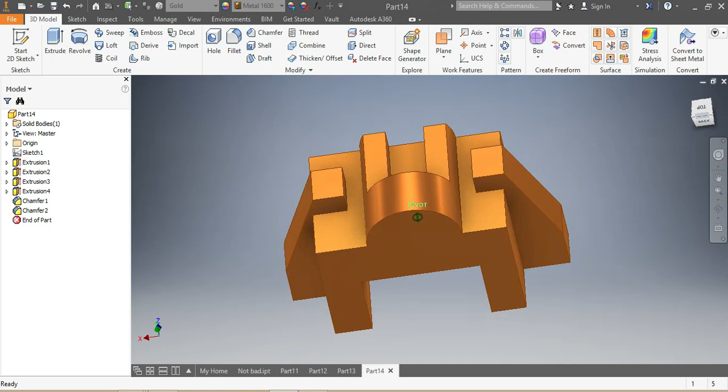How about we draw this mechanical part that we see in front of us? It looks a little bit complicated, but we're gonna go through this. So first we go on new, knowing that the dimensions are in millimeters, go standard metric, millimeter, then go create.

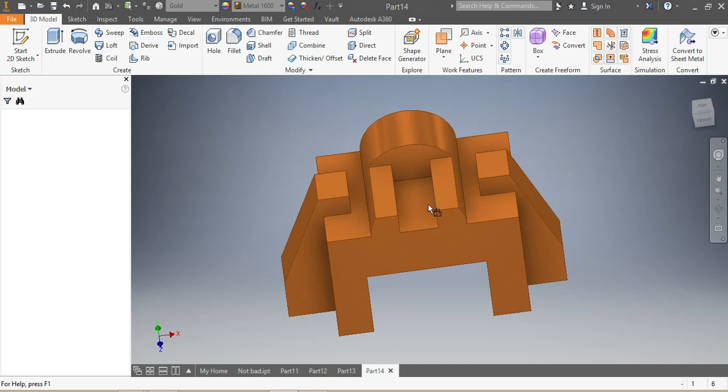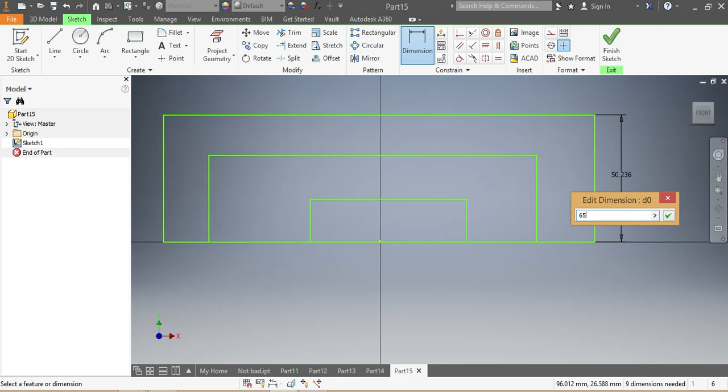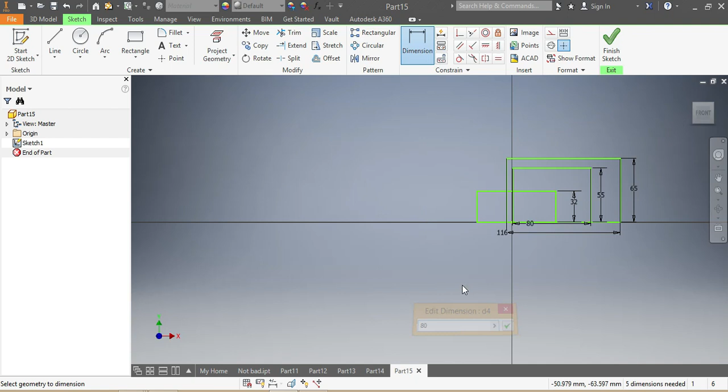In here we're gonna start with rectangles. I'll start with the first one, the second one, and the third one. This is gonna be faster and easier for us. So that's one, they need to be 65 millimeters, the second one needs to be 55 millimeters, the third one needs to be 32 millimeters, and that one needs to be 116.

This one here needs to be 80, and the last one now needs to be 50. So we need to make sure that these lines here correspond with that point that we see here, as our center. So that one's gonna be 25.

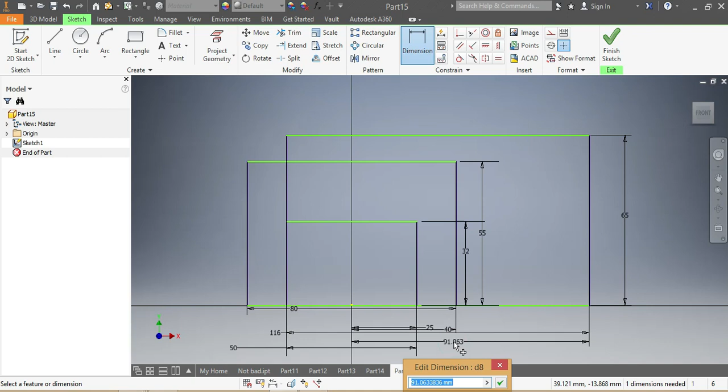Don't worry about that, everything's gonna be in order. So this one here gonna be 40, and the last one from the top to that one will be 58, as half of 116.

So now once I have this placed, I'm gonna go for this part here. For that part, I'm gonna draw a circle. There is my circle, and I need to make sure that this one here is 40 millimeters, almost 40. So for now, I just need to make sure about that. This one needs to be in line with that one. It's in line.

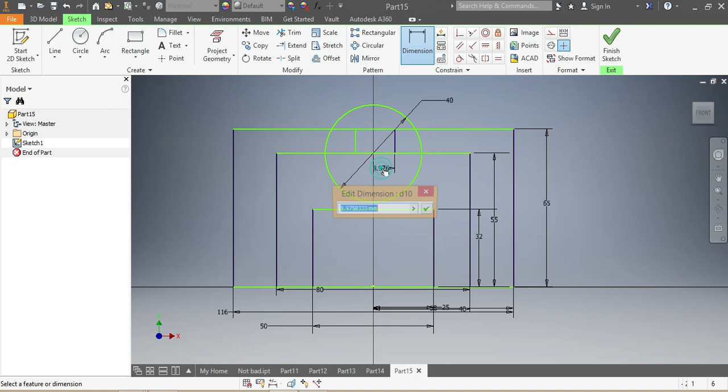And then I'm gonna go for a rectangle. I need to have a rectangle here. There is my rectangle, and this one here from the top needs to be 8 millimeters, and from there it needs to be 16.

Once I have those in place, I'm gonna go for another rectangle. This rectangle here, that side needs to be 54, and this other side here, it's fine, we know what it is, it's 10, so we don't need to worry about that side. And from the top it needs to be half of 54, which is 27. Have that one in place.

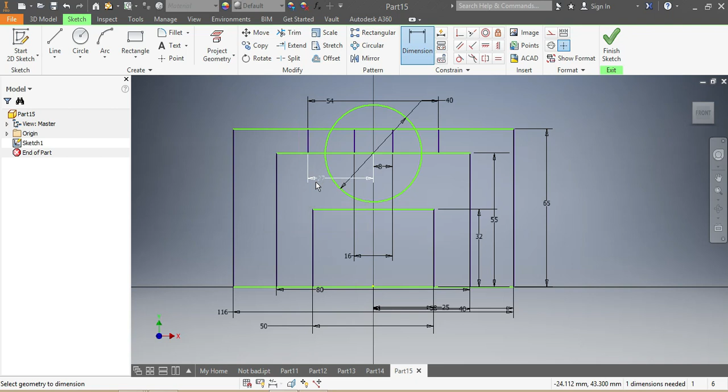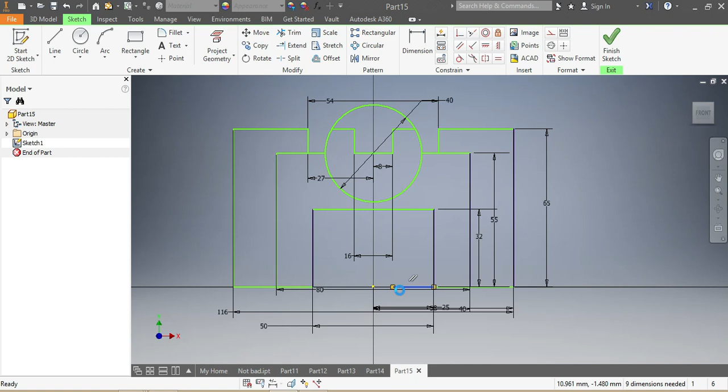Now I'm gonna go to trim. I need to trim this part here as many times as I can. Then I need to trim that one as well, and here, this one too. Oh, I forgot, I need to trim this one as well. I need to trim here, and there again, and I need to trim this here. I had 4 rectangles, so I need to make sure I trim them all.

So now you have the frame, you have to remember to remove this one. Now you have your frame, the frame of your drawing. Now you can go into 3D model.

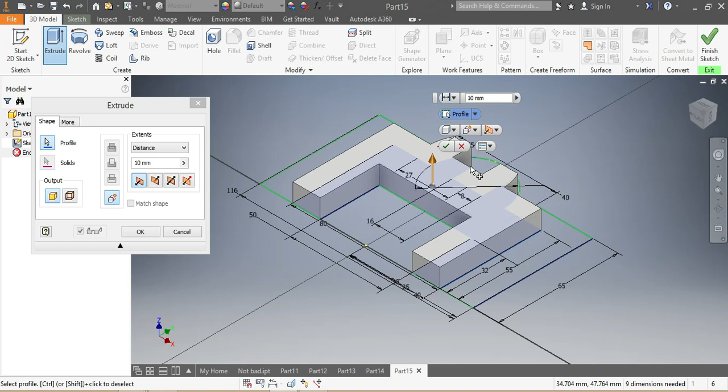So now you go to 3D model, and you click on extrude. You need to extrude this front part here by 30 millimeters. Then once you have it that way, you right click and select visibility. Once the visibility is on, you can see what I'm seeing now.

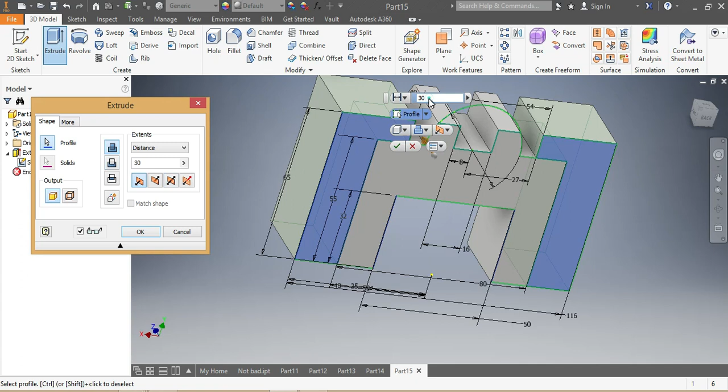So you come again, you click on extrude. You need to extrude this part here, this one and that one, by 15 millimeters, not 30, by 15 millimeters, as it is here.

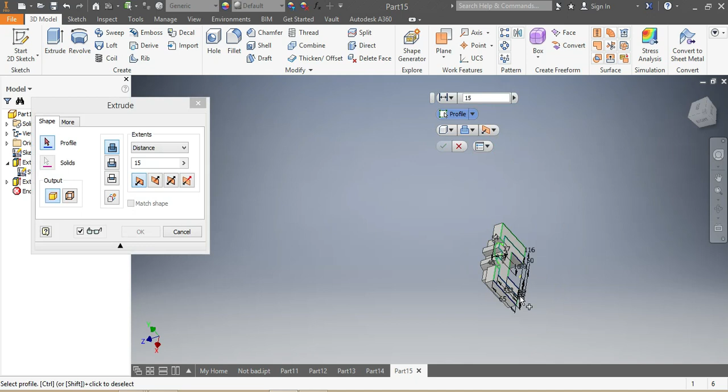Then you come back again, you click on extrude again. You come here, and you need to extrude this part here.

Now, which part did I say? Oh, that was the right part. So you need to extrude this part here.

Okay, so now the other way around, sorry. And now by 20 millimeters. So 20 millimeters - don't forget the half circle there. That part as well needs to be extruded by 20 millimeters.

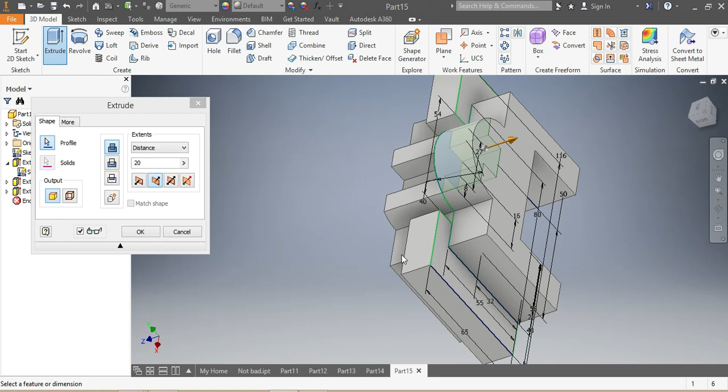So the other side, okay, the other way. So you click and say okay. So now your drawing is done.

Your drawing is done. To make it look tidy, what you can do, you need to come back here and then right click again, you remove the visibility.

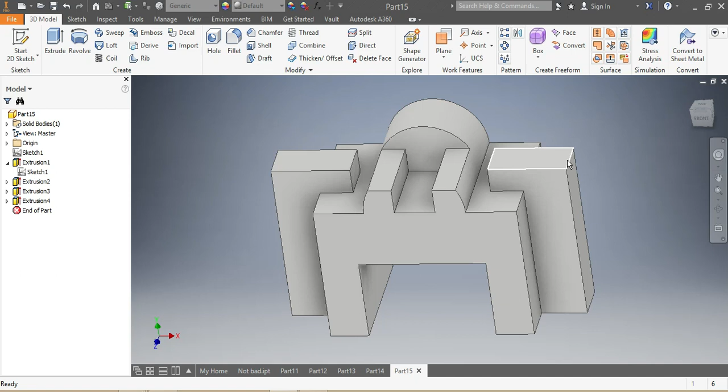Okay, so you need now to draw the chamfer as it is here. I'm having chamfer here. Okay, and that's one, you can calculate the angle if you want, but you can make it easier by just choosing the chamfer with 2 dimensions, with 2 distances - better 2 distances.

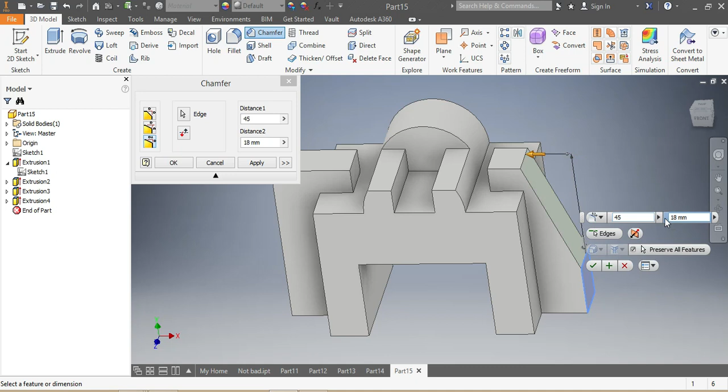So you click on it, and I need to make sure that it goes one side by 18. Which side by 18? No, so this side needs to be at 45 there. 45. If you want to get the angle, you take tangent of 18 over 45. So that's one by 18. And then I'm having that one like that.

Alright, so I come to this other side, I do the same thing on that corner. So I click on the chamfer there. Then now remember, this is different - the X and the Y, whichever direction.

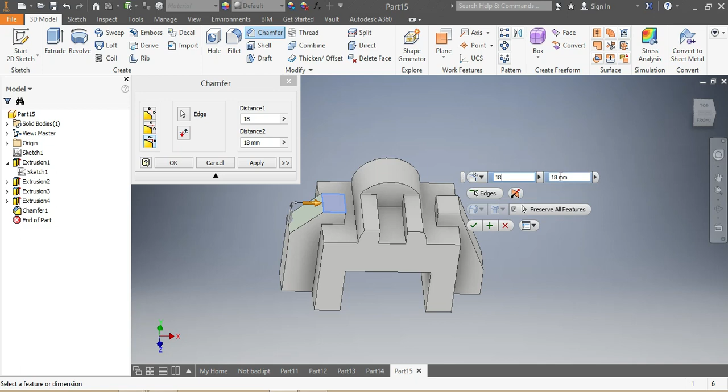So you click the 18, then you come here, you say 45 millimeters. So it goes down with 45 millimeters, comes inside with 18 millimeters. You say okay. So now that you finish your drawing, you can see how beautiful it looks.

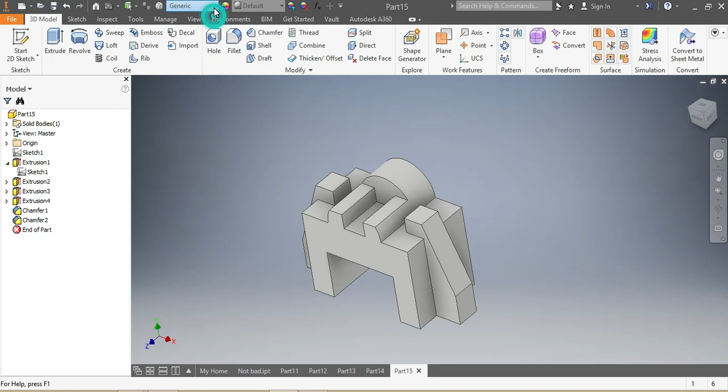It looks beautiful. So now you can choose the material. Myself, I always enjoy putting my stuff in gold. Gold is expensive, knowledge is expensive. Okay, so this is done and you can see how beautiful it looks now.

So I was asked in one of my videos by some students how to do this. So look, this is your bonus. So you come in here, it's about the arc - the way I was doing the arc. So what you can do is this.

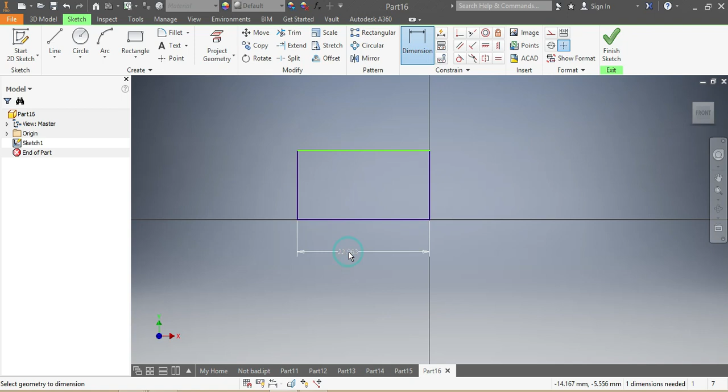And you make sure that this one needs to be 25 millimeters. Okay, 25 millimeters - you see what I'm doing? And you can trim this part if you don't know that.

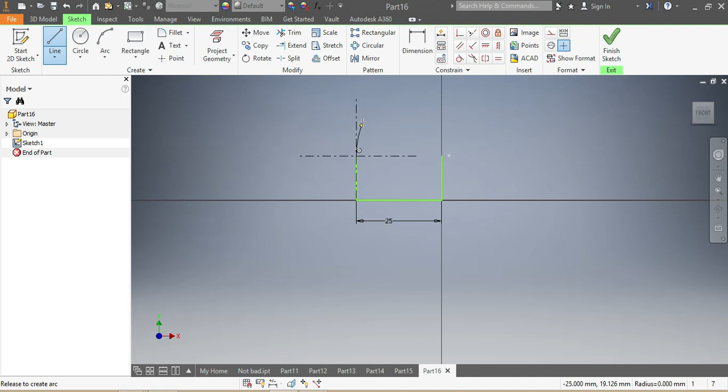Now if you want an arc of a 25 millimeter radius, you can easily do this. Okay, you click on the line there. Now you click there, you hold the line and then you go with it, you bend it. You see, you bend it, then you have your arc there. Okay, then you have your arc there.

Okay, you can do the same thing here. So you do this, you bend it, you have the arc there. So it's not a big issue.

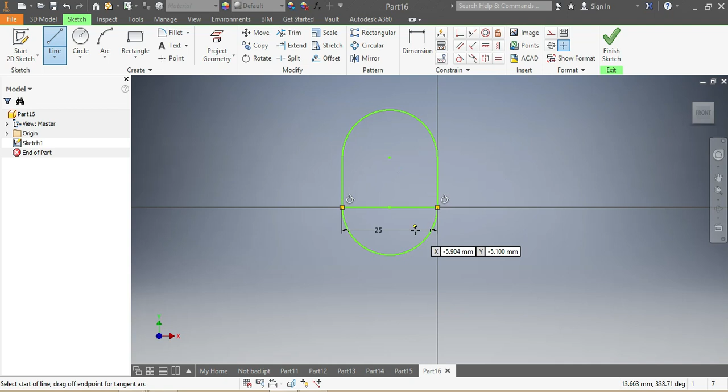Okay, to my student friends who were asking me about this - easily check it out, you can repeat this again. You touch on the line there, you hold it, you bend it, right?

And if you have some doubts about the dimension, you can give it a dimension. You can say this one here needs to be, let's say, 8 millimeters. You can say 8 millimeters, right? Then it's gonna be 8 millimeters. You can make sure about that one as well.

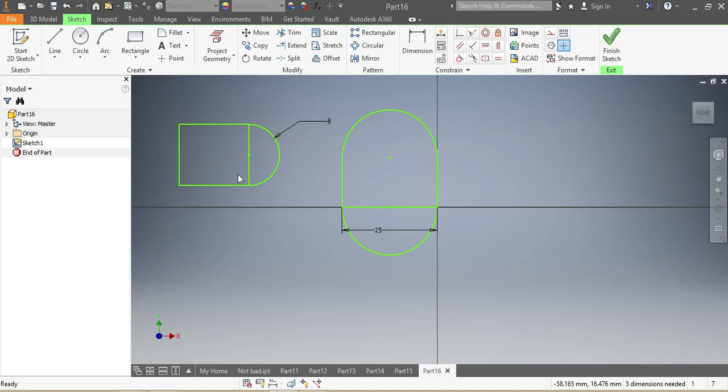So whatever you call it, as long as it's useful to you, that's what matters to me.